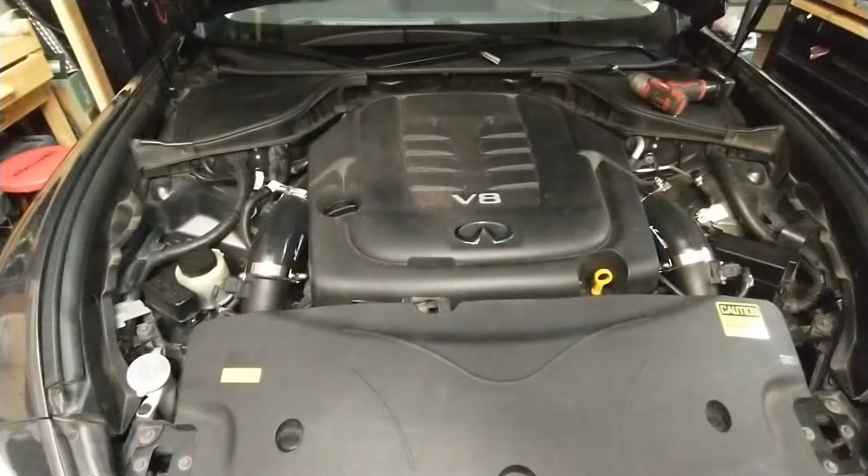This video is for an HPS performance cold air intake kit, so the paper says, but on the website they call it a short ram kit, whatever it is, go figure.

First of all, I did not want to get this kit. I was trying to get their silicone coupler kit, and that's not what's here. This is kind of a homebrew until their kits are available, but every time I order, they're seriously on back order, so I just never stuck with the order because they'll probably never show up.

Also, I used this silicone kit here with some drop-ins, I'll get you that brand name. Anyway, the drop-in air filters were kind of poorly made or just poorly designed, and they ended up breaking both my air boxes underneath. I'll probably have some video of that as well.

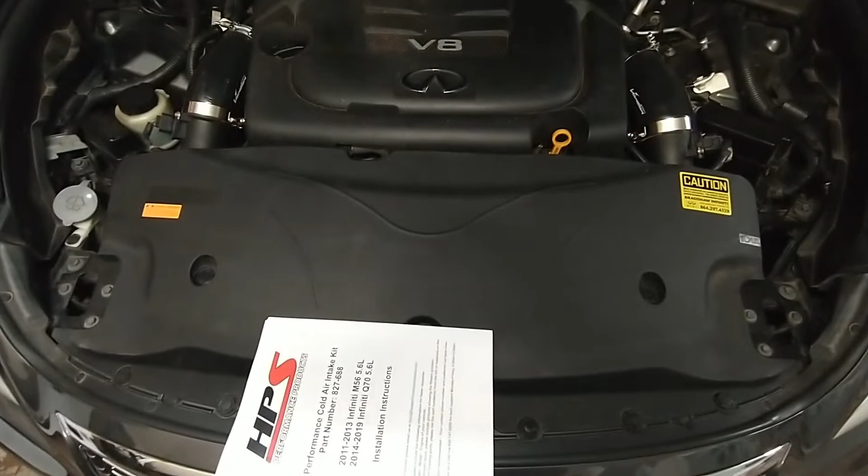The air cleaners are underneath this ram thingy majiggy, air ram. Broke both those boxes, and by the time I replace all those parts, it will cost as much as the HPS kit.

First things, just looking it over, it comes with a, holy cow. Let's see. Also, what's weird is you go to their website and they say something like 16 or 17 horsepower and 16 torque added.

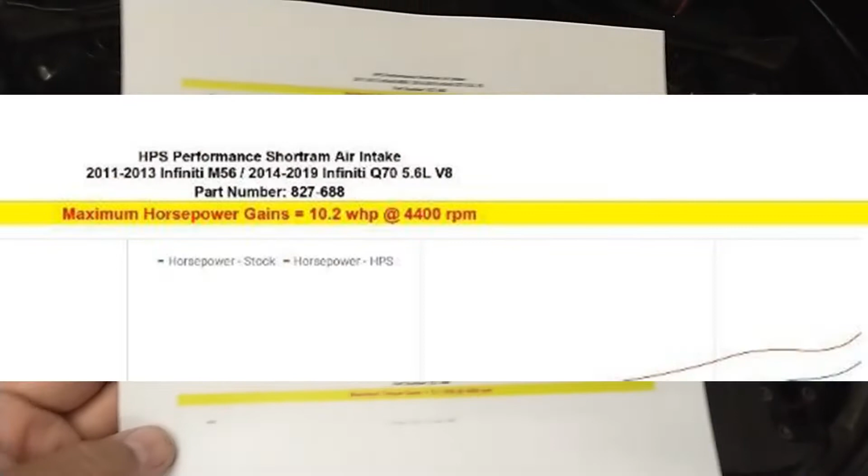Well, in this sheet they give us, I don't know if you can read that, I don't know if my camera can focus on it. On this dyno chart, I doubt it's for my tube specifically, they only add 10.2 wheel horsepower and 12.1 foot-pounds of torque. So I'm not in it for the horsepower, as promised.

I do have the uprev tune on this guy, and it did pretty good, but I'm having some problems. So by adding these intake tubes, because of price, when I get the retune, hopefully we get a little more ponies out of that tune with the cold air intake kit.

Anyway, this is the same air intake kit for the 2011-2013 M56 5.6 liter V8, and also early model Q70s with the 5.6 liter V8.

Here's the majority of the parts that come with the kit. You have some 3 1/4 inch aluminum tubes. You have what they call a MAF sleeve.

It's going to go in, let's see, where is that at? Here's where your mass airflow sensor will go in, this will go in there. It does reduce it from a 3 1/4 down to...

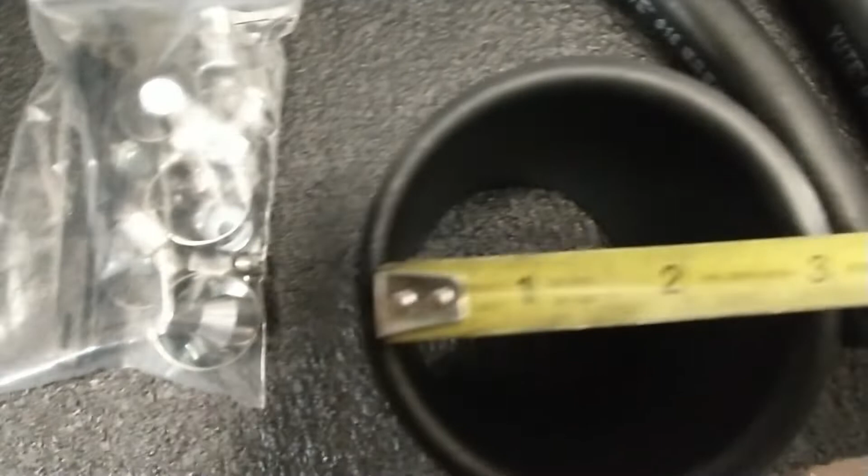Let's see, down to about 2 point... oh my god, where's my camera? 2 point something, let's see, let's do that again. Reduces it down to 2.8, almost a little bit more than 2.8 inches.

Giving it the old scratchy test, it appears to be a glass-filled nylon, so that's going to be durable. So we've got your intake tubes, the silicone couplers.

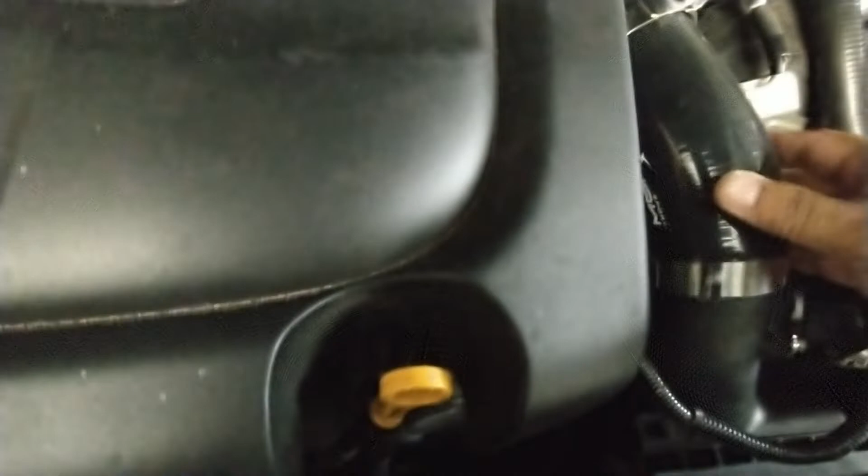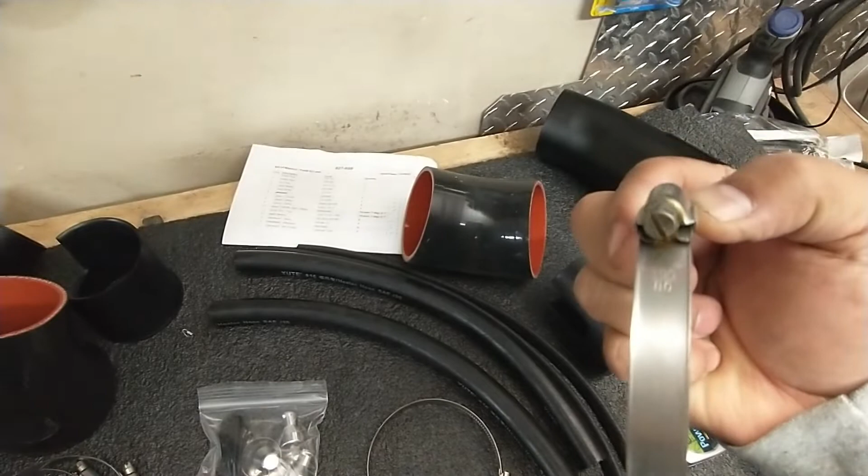It comes with what they list as EPDM heater hose. This will go from your valve covers back into the tube.

These are, can't think of the brand, I don't read, I don't know if that's Chinese, Mandarin, whatever. But I do have some nicer hose from this kit right here, it's kind of like a really firm fiber reinforced, I believe it's Continental brand, so I'll probably try to repurpose these if I can.

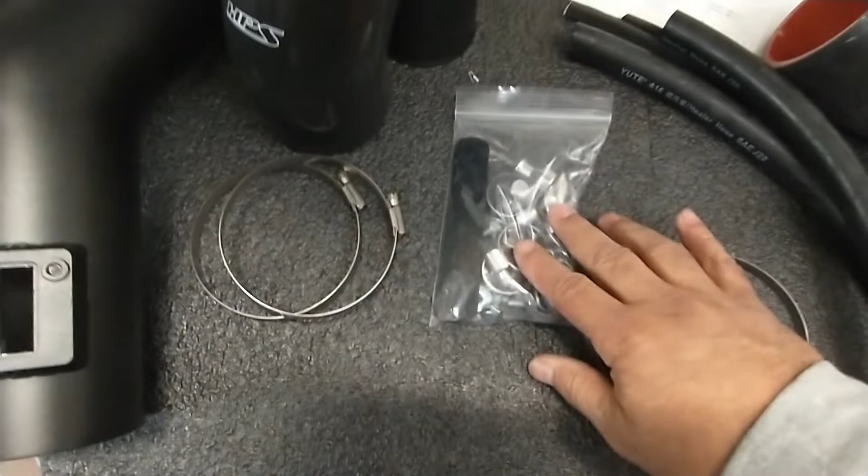And we got a bag of hardware, which is actually pretty well thought out. We got some little adapters that are going to go where the air cleaner box goes, and then we got some more worm clamps, they appear to be HPS.

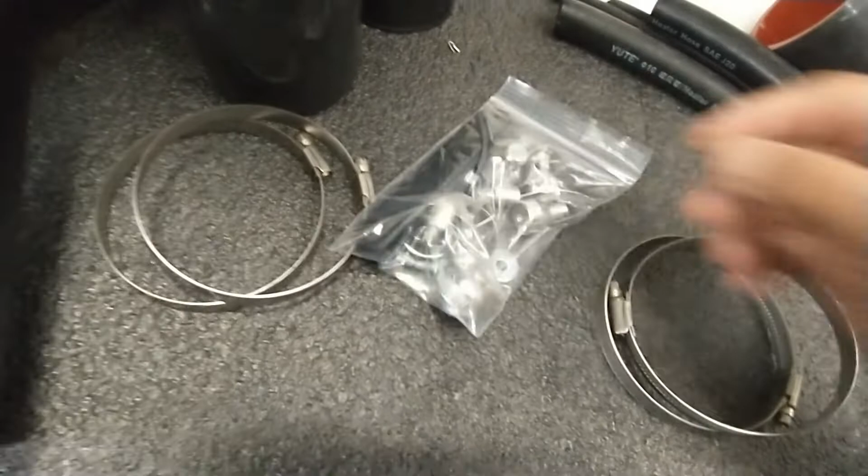Let's see, the tube, really pretty nice, pretty strong, but there are some oddities about it. I don't know if we can get in there.

Let's see if I can get in there. That little thing that goes to the valve cover, there's some splotchy welding, but on the exterior it looks pretty well done. But that little weld, I've seen better on some eBay cold air intakes, and if you look just past that tube or that hole, you can see a butt weld.

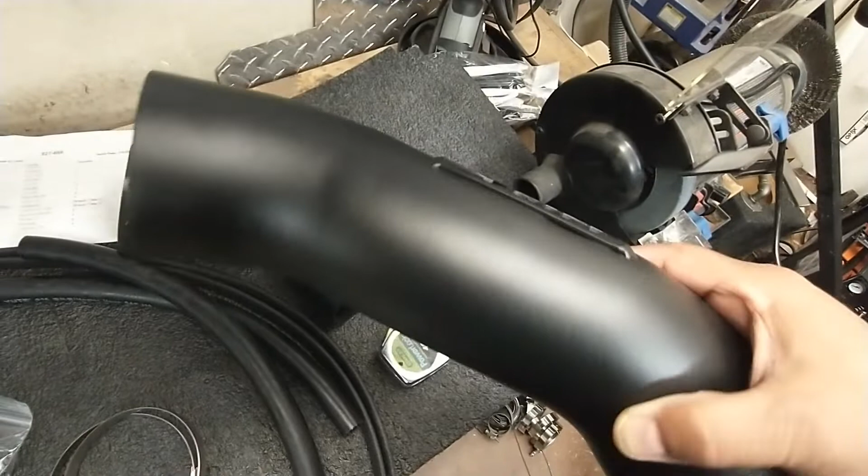A little odd. I'm not really worried about losing cross-sectional area or any kind of airflow. I'm not that worried about trying to squeeze an extra pony here and there off these, because it won't matter anyway. But you can't see the weld on the outside. If you look hard enough, you might see it, but I don't know how they do it on the polished tubes. Maybe they do it a little different, but from this end, the same weld is way down there, so I'm not sure why they had to go with butt welds. It doesn't seem that complex of a shape.

Oh, what else did I forget? Oh, these are little door trims that will go on the heat shields.

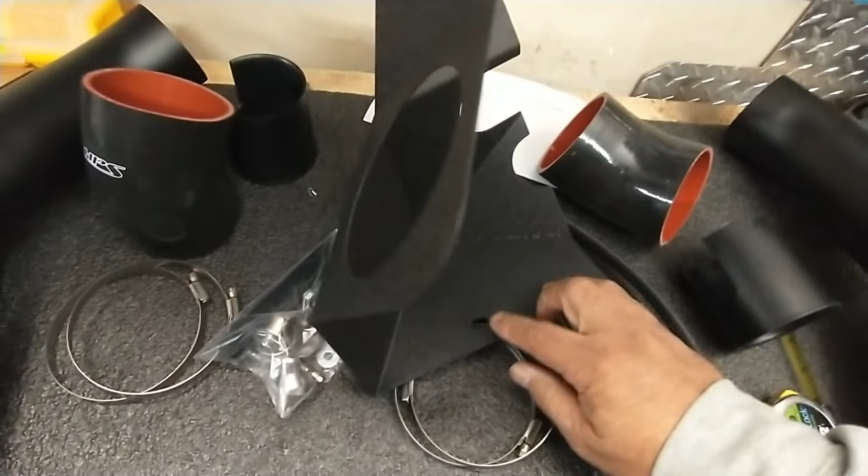And speaking of heat shield, here's the heat shield. It's going to get mounted where the air cleaner gets now. This will basically be a support for the air filter and the tube. I kind of wish I could keep the part of the air cleaner, and I'll show you why later in the video. But this will get bolted into, for some reason I got 4 of these little adapters. I don't know, I think there's a little strap or anything.

Also in this kit, out of all that stuff, they did not include an instruction sheet. I actually have to print that out. It's available on their website, but odd.

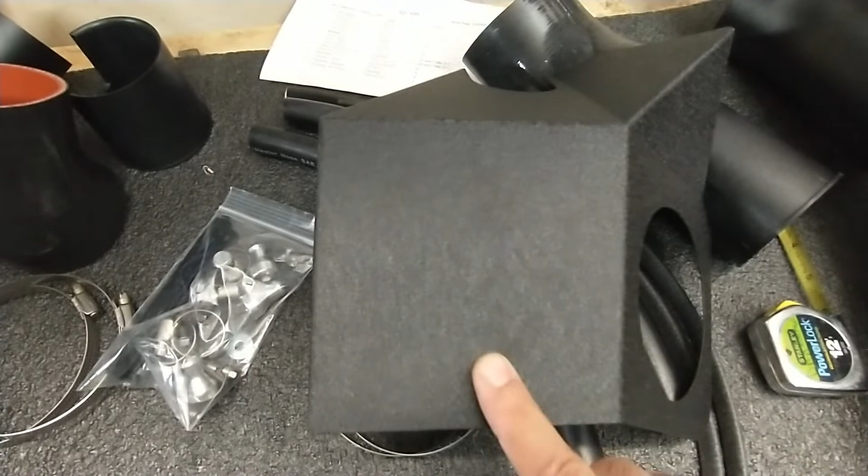Let's see, that's the heat shield. Oh yeah, and the heat shield doesn't come in an option of colors as the tubes do. The paint is not the same, or the powder coat's not the same. This is kind of like your wrinkle or your crinkle paint you'll find on old-fashioned toolboxes. Maybe not as intense as a Honda VTEC engine cover. And this is a way more subdued, very light textured black. You can see it fairly reflecting the light.

Anyway, let's put this down. Yeah, look at all that Harbor Freight tooling there. This is an HPS air filter.

It's an oiled filter, like a K&N. I was really hoping to get out of the oil business. I don't like having to clean it. They get nasty here in Arizona. They get full of sand real quick.

So hopefully, maybe later down the road, I've already spent too much money on this so far in my car that I'll replace these with some dry flow. But some general dimensions, the element.

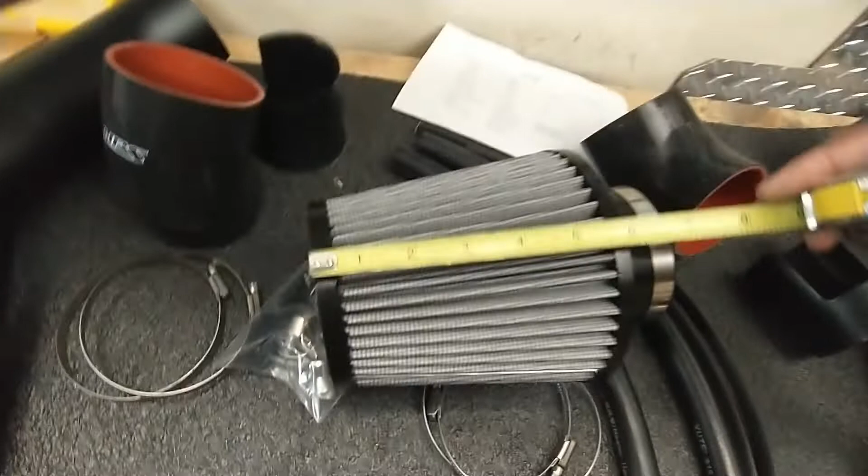The element is just shy of 6 inches. Overall length is about 8 inches. The minor diameter, if you want to call it that, is, come on, little almost 4.5, maybe 4.4 inches. A larger diameter, this one, I have to eyeball this one. It's about 6 inches. So with those dimensions, I'll probably replace it with something.

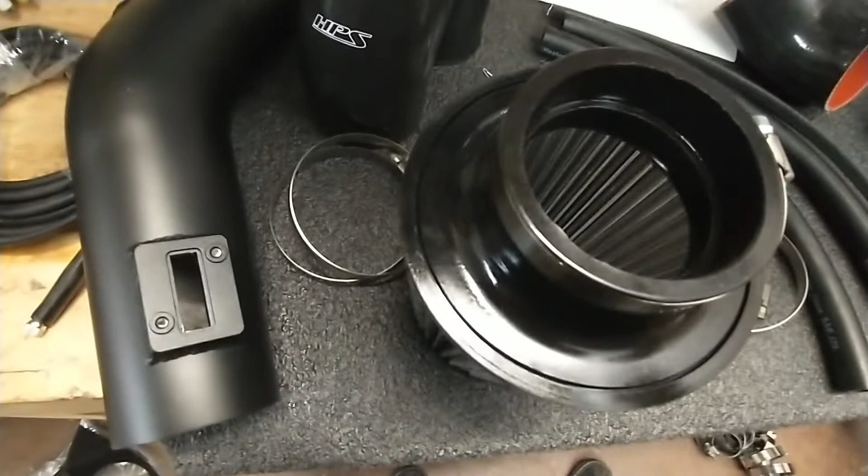This one, unlike any air filter I've seen, does have a stop right here. So there's no guessing where your air filter goes. This has a stop, but this should be 3. I think the tubes are listed on the website as 3 1/4. These are coming out less than 3.2 inches on that inside diameter.

Tubes are about, where is that? The tubes are about the same, just a little bit less than 3.2 inches, so not exactly 3 1/4, but close enough. And then back to the filter.

They didn't give me some of these nice, they're fancy HPS worm gear clamps. These look like regular old stainless steel clamps that you get for a garden hose. They're 70 to 90 millimeters, or 3 3/4. I don't think they have a brand on them.

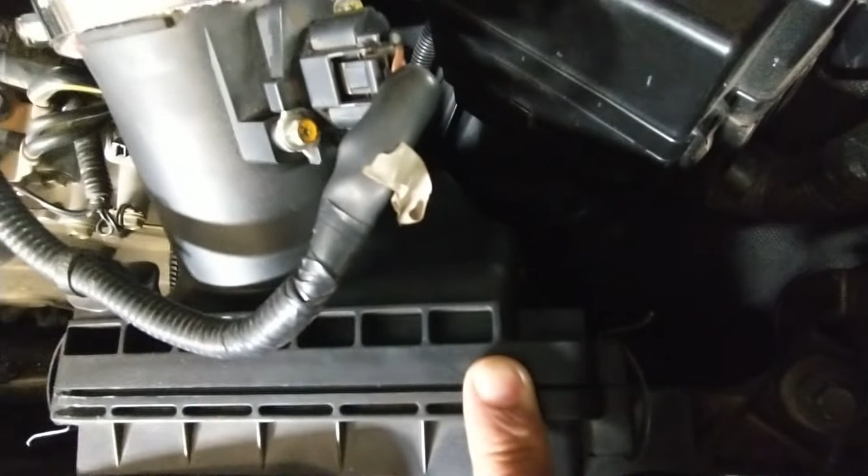They have Dyna Dyna Flow. So hopefully in my bag of clamps, I think these 3-inch clamps maybe will work. I don't know, these T bolts. All right, I'm gonna do some disassembly and I'll try to explain some stuff.

All right, so now I got the engine cover off and the Infiniti air deflector, which everybody's wondering, it actually directs flow from behind the grill down into these two air cleaner boxes. And this is kind of what I was talking about.

So you can't see it now, but I have some AEM dry flow air filters made for this car. But when I first had them, you could see this big bow, like just bowing out. And didn't really notice, and it broke the tab on this portion of the cleaner. That part was about 110 bucks to replace.

I contacted AEM, and they said they found a tolerance mess up in their die or in their molds, and as a courtesy, they sent me 2 new ones. But those 2 new ones were actually an older run than what I got now.

Sorry about the garage heater going on in here, or the heater to the house. I'm in the garage, it's about 60 degrees in here, so the heater's on.

I explained to them I don't want to pay for this. I got it, but they sent me 2 new ones, and those 2 are older, and they did the same thing. I'll take this apart in a minute and show you, but it broke this part.

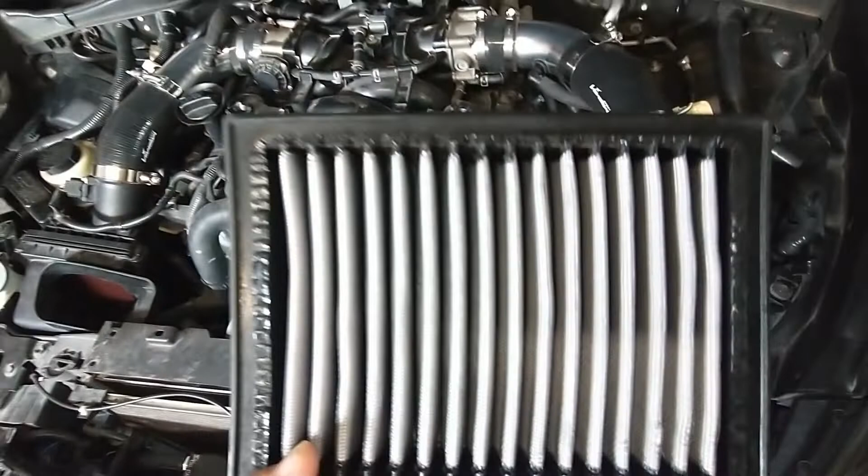As I was doing some work on some catch cans, I noticed that this side of the box is now damaged. I don't know if you can see it, but there's a pretty thick crack in there. I come over here, and I think if I'm lucky, this box that I had to replace on the other side did not break, but this part broke. There's a break there, and it goes all the way through.

There's also, I don't know if you can see it, but down in here on both of them, what those filters did is they actually bowed the plastic to the point where there's just a little tiny air gap. You can put a flashlight and see the gap, but I don't think I'll do that, it'll be too much camera work. Anyway, the damage is done, these air cleaner boxes are shot.

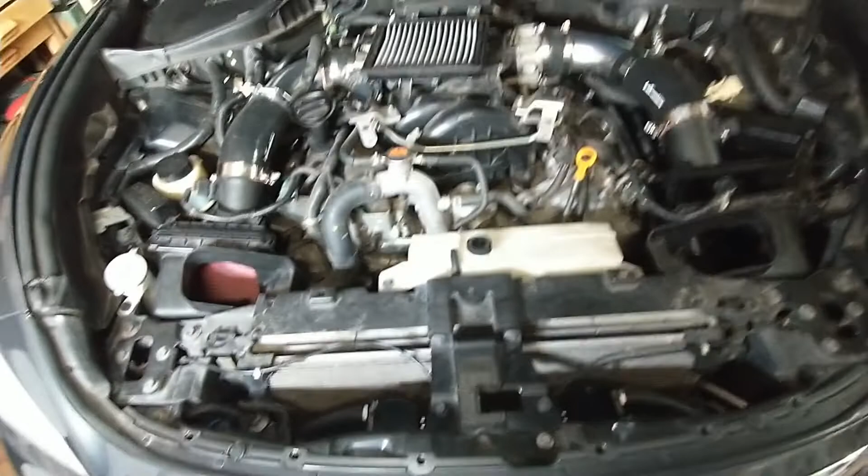One thing I saw some Amazon reviewers doing was trimming, because they had problems with fitment as well. Let's get this mass airflow sensor out of the way. Get over there. Oh, son of a biscuit eating. Anyway, let's see if we can.

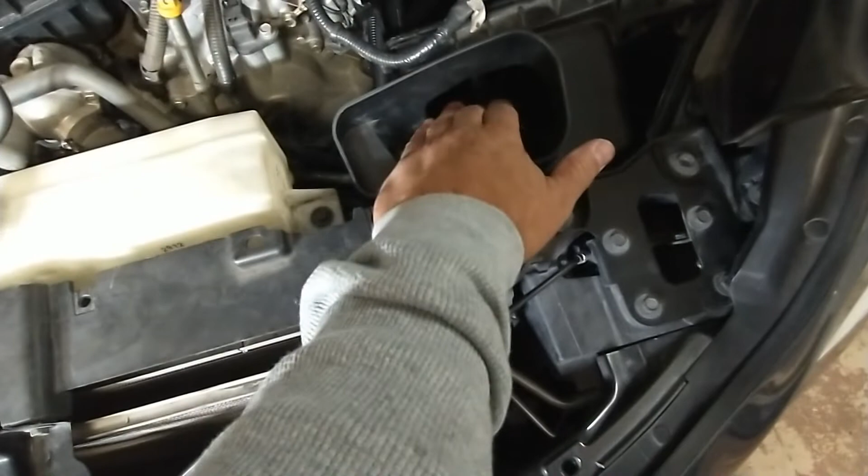I'm going to put this down. Here's the AEM dry flow. There was an edge, and I have the new ones, but they're still in the package in the house, I don't feel like getting them. There was just like a little seam or a seal, and it actually was just way too thick, and that's what was making that air cleaner just bow and look gross.

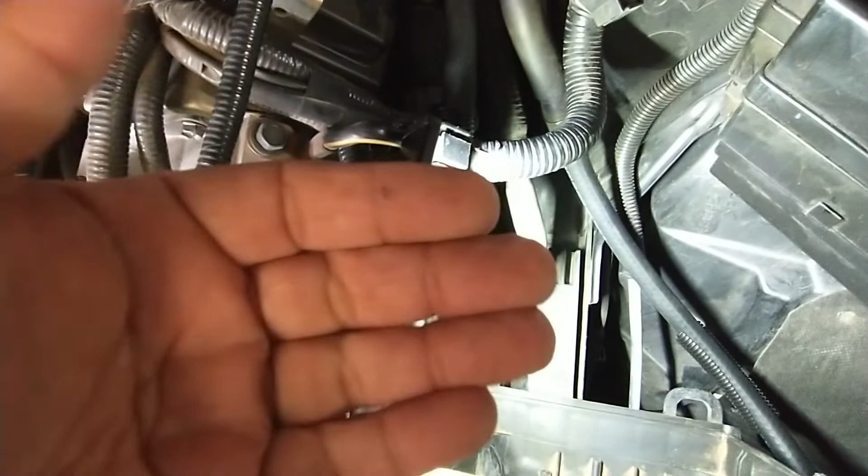That one's too new, I can't show you the crack, but that's kind of why I'm going with this cold air ram. It's not that I believe in cold air intakes generally, but in this case, I really think this will be a cold air intake. What's going to happen is there's going to be an air filter from the HPS located right about here, just where this air deflector will actually put air right into that filter.

One part of the kit I wish I had, or wish they did differently. Let me pause real quick and I'll get to that.

So let me see if I can do this. Right about here, there's 2 grommets that hold this on, along with only 1 bolt. Their kit's going to utilize some adapters that go in there, and I got a screw in that heat shield, which is kind of important for supporting all this tube and stuff.

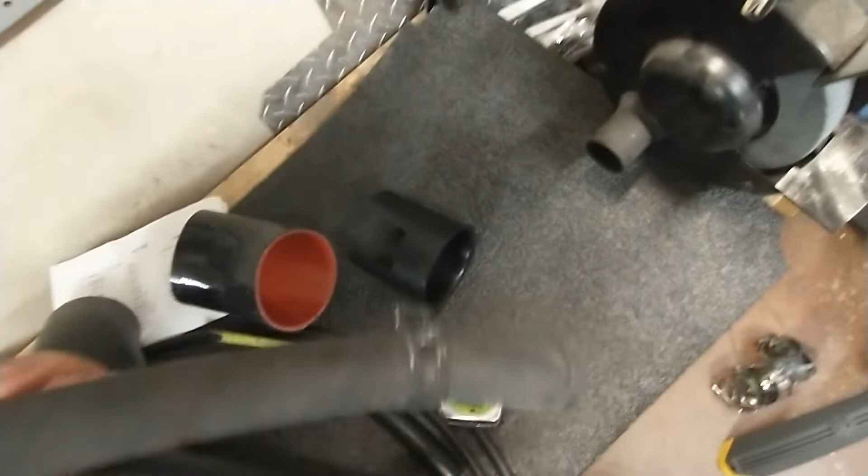But I really wish they had made it so I can put the heat shield there, maybe slide underneath, maybe make adapters or something. Since these boxes are shot, I might drill a hole through there to hold that heat shield. I don't know exactly how that's going to work out, or maybe down the line modify those heat shields so I can keep this box.

Because what will happen is air will go into this air dam, down into this little duct. There's like a little deflector in here, and it'll send the air straight into that air filter, which will be in kind of this position.

So I'm going to play around with that. I probably won't get it done, and I'll just get this installed so I can play around. But I really wish HPS would make it so I can keep this little tunnel thingy majiggy, because there's no filter there, it goes on the other side. All right, so I'm going to start putting this together according to the instructions and see how it goes.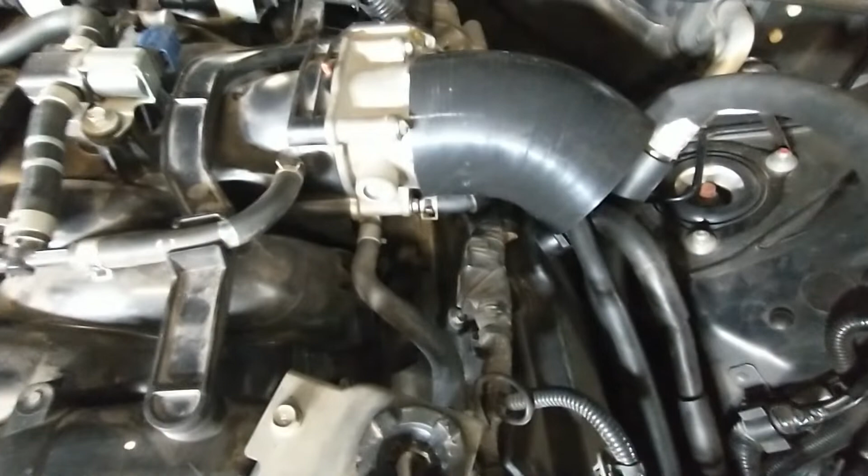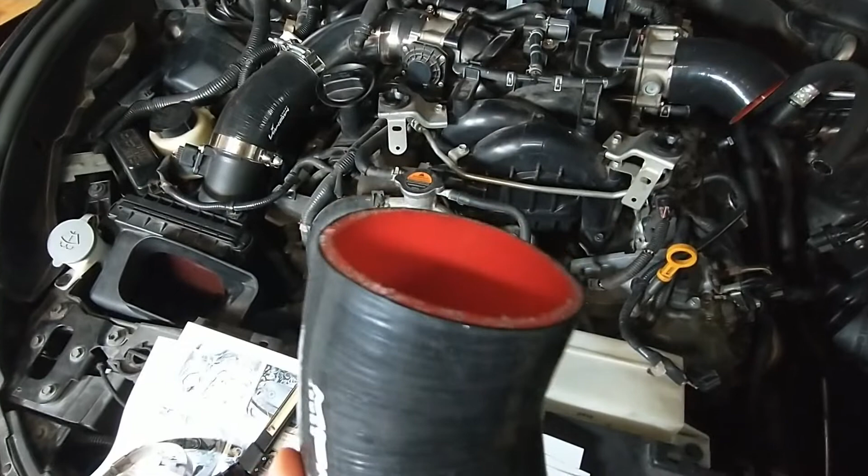As I'm taking this apart, I'm noticing this little spring clamp is way better, way quicker to work with, especially on the side of the road. I get to use these clamps on the manifold to this little tube, and they're the same hose, almost coincidentally about the same length. It's already got the nice pre-curve here, and this is actually an Aeroquip hose I got, a way nicer hose than the Chinese EPDM. Anyway, I'll be reusing these nice hoses, thank God. I couldn't believe how perfect a fit these will be.

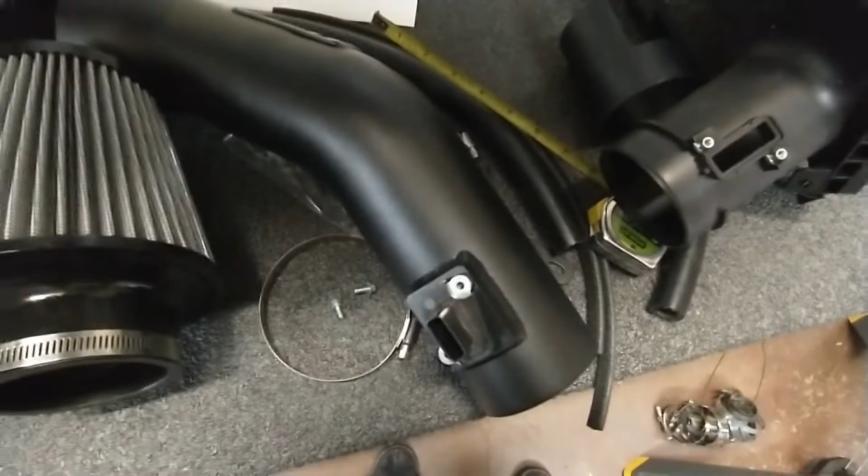Step 11: insert short side of the coupler into the driver's throttle body along with the provided clamps. Now, this fits really loose, not a turbo so I should be okay. But oddly, this knee tube off eBay fits on there way better. You kind of have to really try to get it on there. Part of me wants to cut this coupler down to that size, but it won't fit the aluminum tubes. I think they could have done better with that somehow, maybe a more custom tube. It is branded, but I think they could have done better.

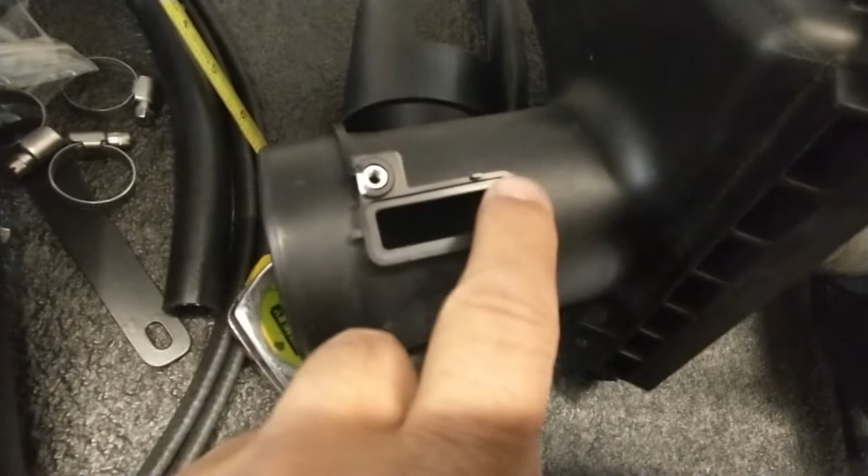Did you know Knight Rider's KITT can drive on water? That's the first I've seen that.

Step 13: insert provided M6 bungs into the factory airbox grommets. That's these two guys. This is where I wish somehow I could adapt the plate with the factory air cleaner box to get the air to go through.

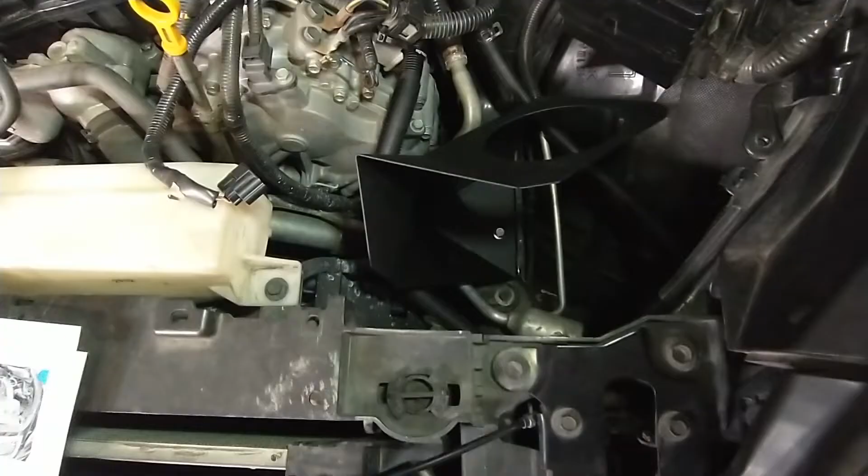Step 16: remove the mass airflow sensor from the factory tubes and install it into their tube. Lucky you can't put these in backwards. I'm glad Nissan did some kind of design, otherwise I was a little worried because this is symmetrical and doesn't look as obvious, but it only goes in one way. Also this cutout, they incorporated a little rubber cylinder that fits in there. It doesn't feel as positive as the factory one.

I'm not going to put any O-ring grease on there, that's just silly, but I'll have to be a little more careful installing this into the HPS tube. So I got the mass airflow sensor in, and I think I know why it felt a little weird: the O-ring gland in the aluminum tube is just a little shallower than the one in the factory airbox, so the O-ring goes a little squishy going in, but it fits well. There was a little schmutz probably from the powder coat. These went in a little hesitant, I almost felt like I was going to strip them, but wasn't too worried. I could re-tap them if I have to, but they do go in. There's just some powder coat in there.

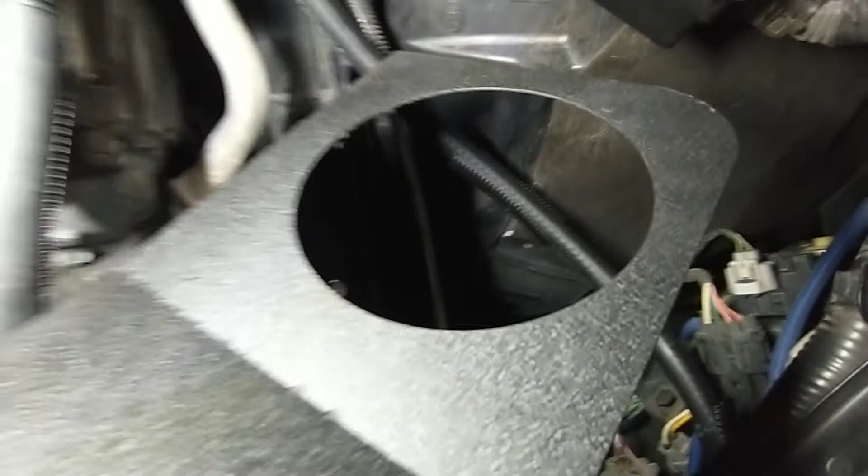Just keep screwing. Step 17 -- did I say the last step was 17? This is 17, install the heat shield. One screw goes in here, and I already installed that one previously. There's a little bracket underneath, I guess it helps make those two rubber grommets one single unit for rigidity. And this went in pretty easy. It's a tight fit in there.

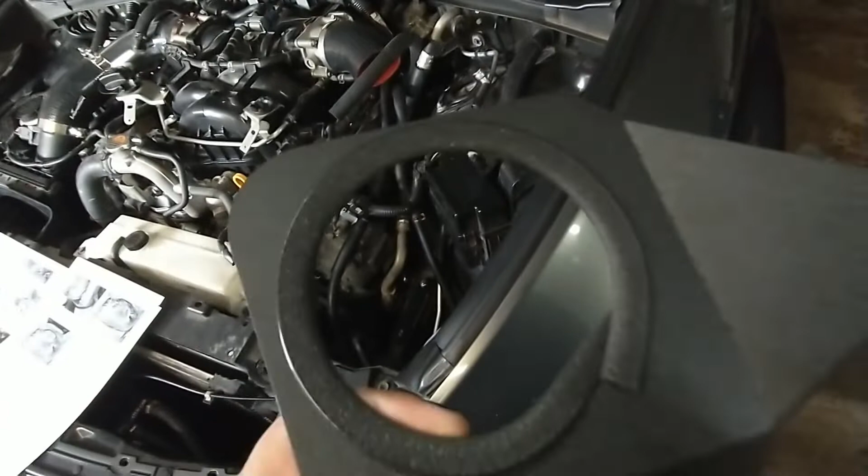I assume the other side's going to be even tighter, but downside, you can see this little tube rubbing right against it. That goes to my oil catch cans that I spent all weekend doing. So I'm going to have to either buy more hose, reroute this, or maybe add some really ghetto generic chafe guards made from wire loom. Down there, that tube is the other part of my oil catch cans, getting a bit of rubbing too, so I might use this heat shield to my advantage. Maybe drill a hole on the side and make some smooth piece of plastic, print it, or make something. But that's another hurdle I had to come across.

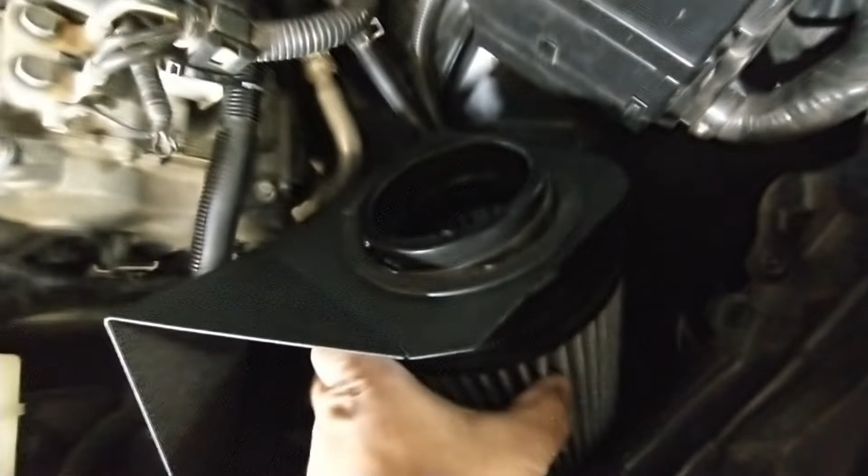These screws actually miraculously tightened pretty well, seeing that the little bung just goes into a rubber grommet. I thought there'd be some spinning, but that screw bolts in pretty tight. Well, I didn't read the instructions right.

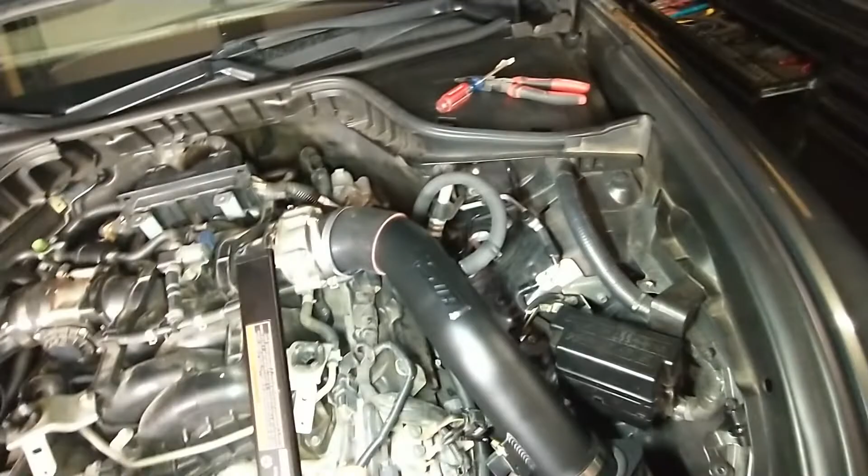Before I put this heat shield in, I was supposed to put this trim in. This is odd, I thought the trim would go along the edges, like you see on a K&N or other filter, to seal against the hood, but this won't go near the hood. It's a little long, and honestly this has been the most difficult part of the whole process. I'm just going to guess where my trim goes and finish putting it on. A little snip, and it's in. Not pretty, not perfect, but hopefully it'll be down like this and no one will see it.

Next oddity: the next step tells you to put this filter in through the hole, but it doesn't fit through here, so you kind of have to force it, which feels gross, but you won't be able to get to that little screw easily otherwise, so you gotta do what you gotta do. Also with this in, oh come on, it's gonna go like that, so my idea of scooping air to there may not be the most optimal. Also, it's gonna be weird to get to that clamp. Maybe the clamp goes on the other side, we'll see.

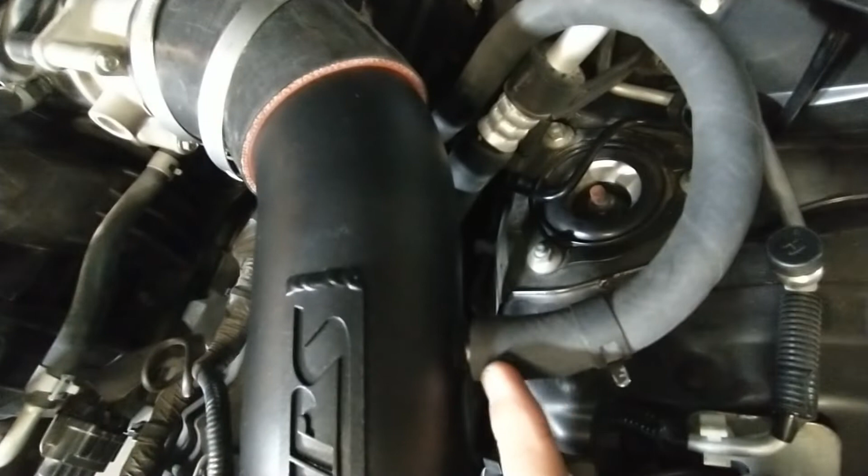Next oddity was trying to figure out where this tube goes. I've done a lot of cold air intakes and home brews and never had this much trouble. It's a matter of getting this to follow this right, and this thing is really not supported. There's a huge gap here. I'm gonna keep trying, but this hose does not fit this geometry. If I shove this tube more into here, this hose just starts to run into this radiator right here.

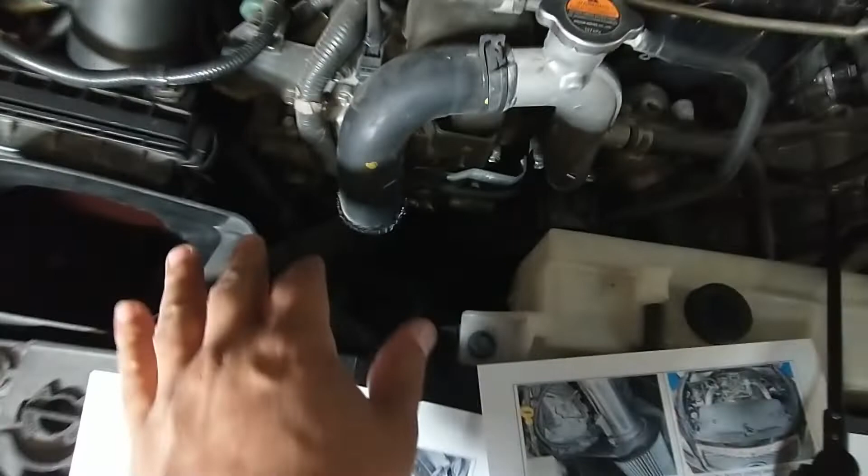Man, I've been fiddling with this for a while. This isn't the hardest, but the longest part. Also trying to keep this tube from crimping. I could probably trim it, but honestly I don't think that's going to help. Pictures and the instructions don't quite explain how this goes, but I'm battling the curve and the breather hose.

And this filter hits a thing we really appreciate here in Arizona: air conditioning. Right now I can get my hands in there, which is good, but this thing fits a little better if I pull it forward, and if I pull it forward, the air filter hits. But I don't think it's going to get any stiffer once I clamp it up, so eventually I'm going to probably make some brackets.

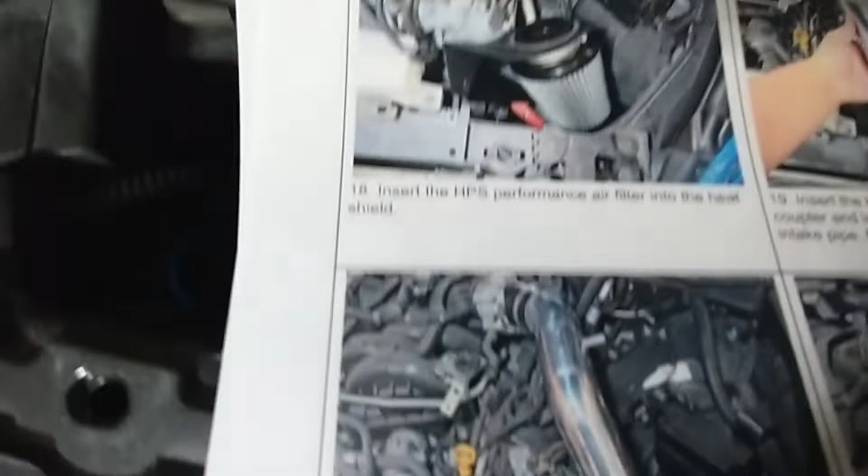I have a bunch of little brackets, maybe come over here, bend it, and bolt something in here just so it's more rigid. And then same thing, I'll probably try to make something over here, but I might keep fiddling with this and see what I can do.

Well, that's about as best as I can do. Let's move this. As I move this pipe forward, it'll pull this right out of the grommet. This doesn't bolt in, but I got it to work. This tube isn't crimped, it's a pretty rigid tube from Aeroquip. The clamps don't look that great because it's kind of on a curve, but it'll do.

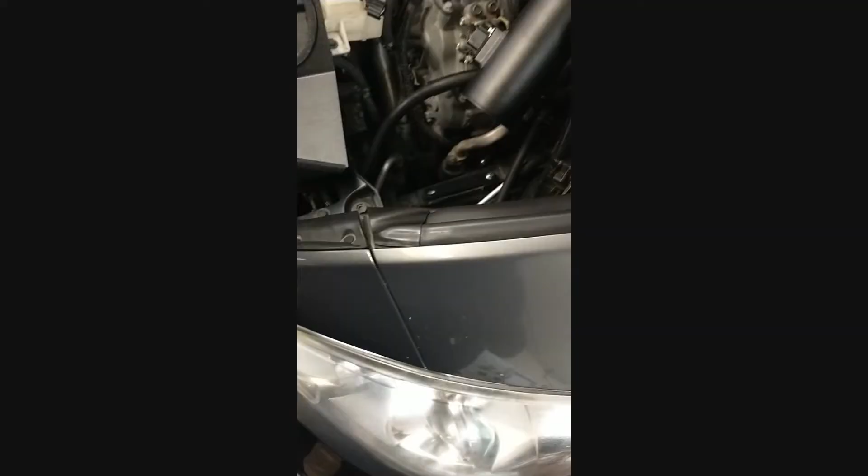So I take it this side's done. I'm not going to be able to build a bracket, and I'm not sure if I'll even include it in a video. We'll see how long before I edit this video.

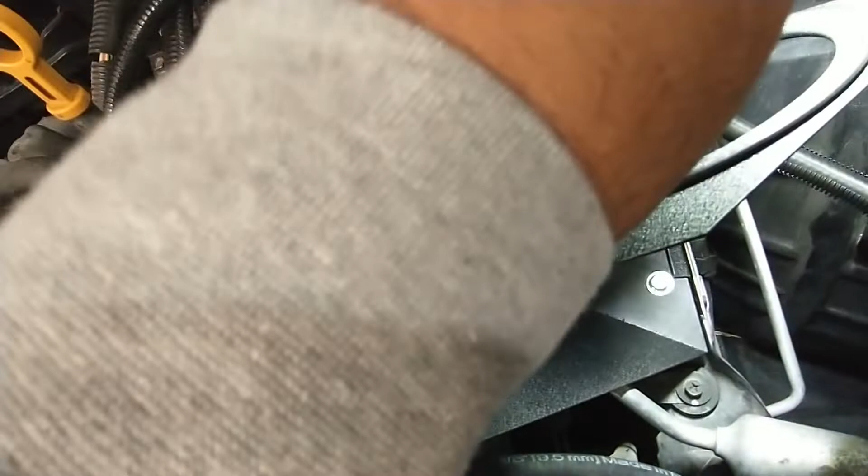Once you get my thumb out of there, once you get it in there, it's pretty firm, but as you wiggle it, nothing really hits anything. I just have to worry about my oil catch can hoses. This one down here seems okay, this one's a little tight, and I'm just too tired to do all that stuff tonight.

Well, that's the driver's side done, so I'll get the passenger side in real quick.

I really need to learn how to read. I was also supposed to put that leftover trim piece here. I guess that will prevent some rubbing against the metal frame, which is pretty good. Good calling them. And I also forgot to put these bolts in with washers.

My bad, another damn situation. I try to put this trim in, but it gets in the way of that bracket that goes from bolt to bolt. Let me get some light out. It kind of gets in the way. Also, I believe it's pushing it too far back.

Right now this heat shield hits part of my air conditioner. If I do this, you can see that there's some weight on the bracket. It's definitely on it, I can't even put this awesome Rock Auto magnet between there.

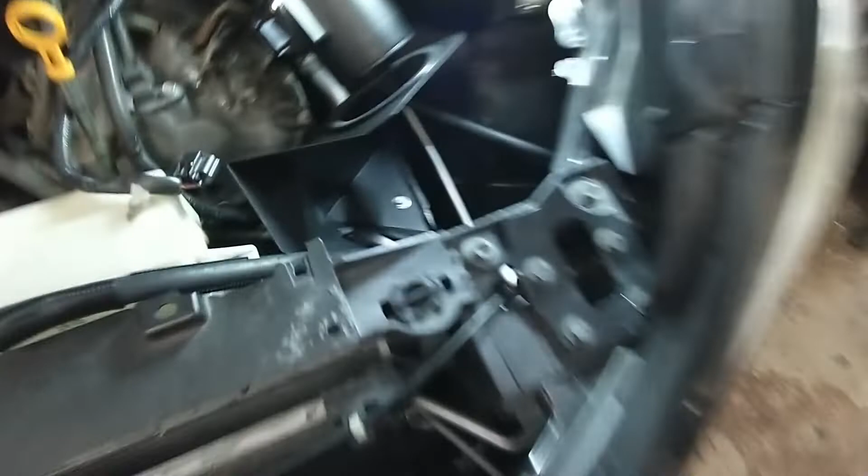How about that? I'm going to remove that little insulating strip, and maybe it's supposed to go on the car. I can't tell, but I think it's going to fit better if I take that off.

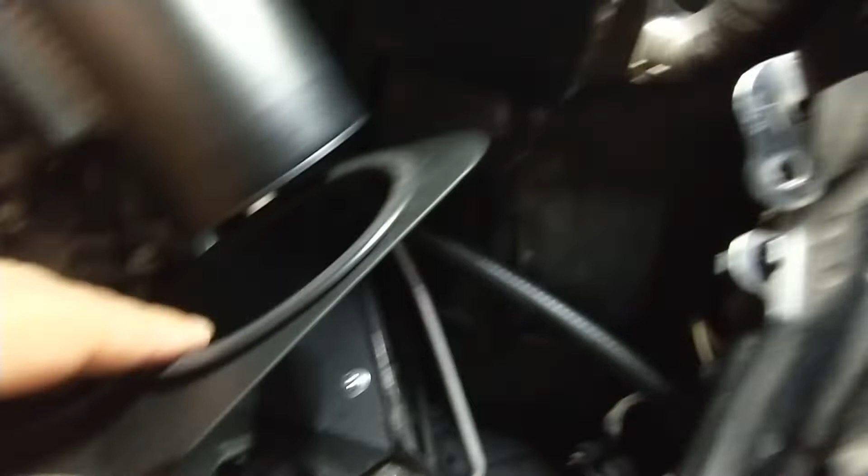Well, that took too long. I got it in, did not put that extra piece there. I actually punched some holes with my handy dandy Harbor Freight hole punch. I suggest you actually get one, you never know when you need one, like today. That's probably the second time I used it, but I'm glad I had it.

You can see I cut quite a big gap, almost defeating the purpose of a heat shield. And then I use the trim right here. This is just like a little bracket or isolator, but there's actually like a clamp. So it's kind of, I didn't want metal on metal, and I got tired of cutting holes to make this thing fit.

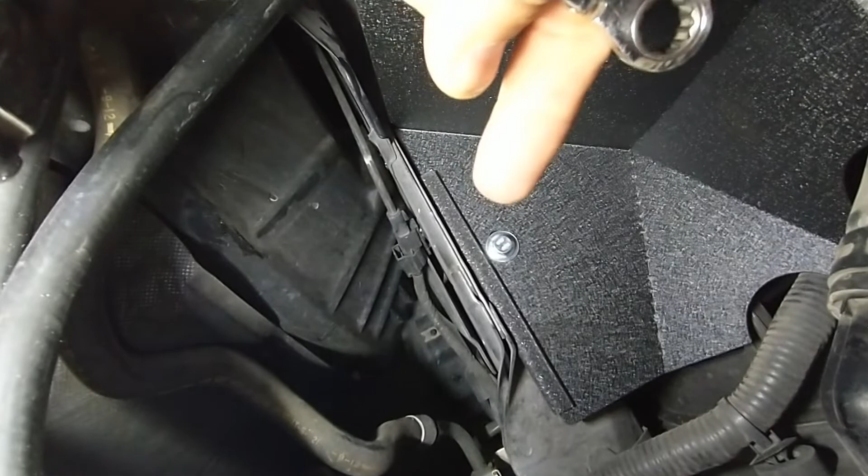But you can actually see, can I get something flat? You actually see how that AC line really gets in there. So I made a big gap. I'd rather have air conditioning than a fancy schmancy cold air intake. But as I did that, this is now somewhat in, really not that great.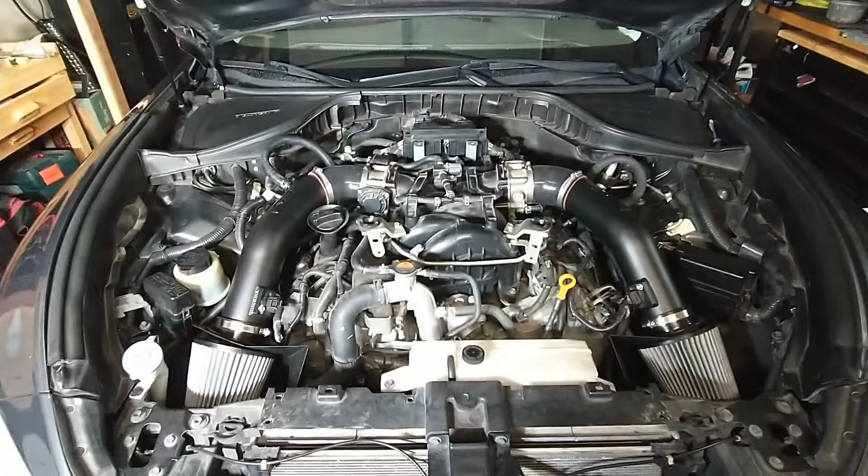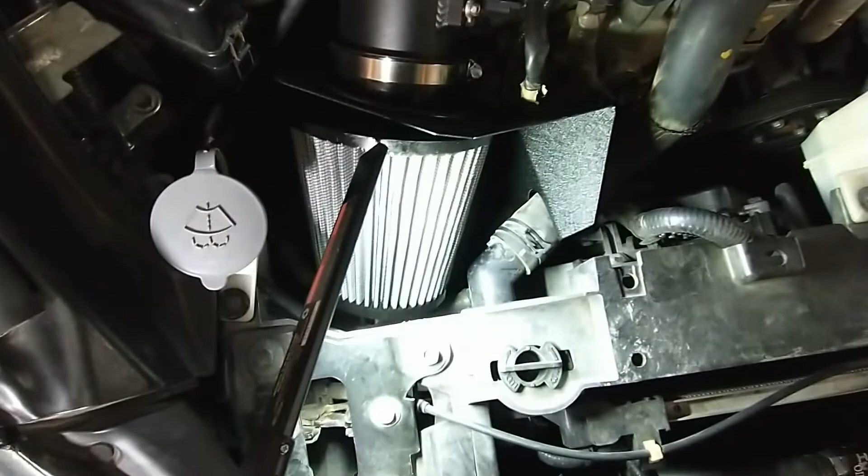I really need to make some kind of other bracket somewhere, but just loose as a dog. All my bolts, I'm checking all my, you can't see back there, but both bolts are pretty tight. After I did that, now I'm going to have to readjust this tube. Oh my god, this thing should have been a little quicker, especially for the $400 you pay for these kits. Alright, I'm going to try to readjust that and get to the other side.

Alright, passenger side went in a little easier. I was able to use the weather stripping. It kind of makes it a little firmer, but whoo-wee. Can we get some light in there?

That is cutting it close. The upper radiator hose is actually hitting. Son of a bitch. So I might put the hole punch to some use, but I don't know. I'll figure it out. Well, she's in, but it's not in its final state.

Right now you can probably, I don't know if you can tell, it is not symmetrical, which drives me crazy. This one kind of follows plane. This one kind of has to come up a little bit, but that's the only way I could go. Let's see if we can get a flashlight.

So the only way I could do it, I had to adjust all this hose just in order to clear that hose, and there's a loom underneath. So I'll probably end up making those holes bigger than they need to be.

Also, probably what I'm going to do this weekend is make a bracket from here to here and from here to here maybe, and then hopefully it can readjust all this stuff. Like I said, this needed more adjustment than a damn corset or something like that. I don't know, I'm not very funny.

Anyway, this took a lot of adjusting, just frustrating getting it in there. And then my Aeroquip hose was just a little too short, so I am using the Chinese EPDM rubber hose, but I'll order some more of that fancy Aeroquip hose.

Then I'll also probably have to adjust this down as soon as I get some holes fixed on there. But this overall thing is really not... it's not that great. I mean, it is wacky. I don't even know if my cover will fit.

And for $400, I expect it just a little bit better built. Also, there's a huge gap right here that I just couldn't get rid of because of the holes.

Since this one's a little loosey-goosey, I'm going to have to keep an eye on it. This one's nice and firm because there's hardly any gap, but they don't give any provision for this. Not like I'd want it on the hose, but they didn't think about the looseness.

This mass airflow harness is going to sit there. Air conditioner, what a problem that was. But like I said, it's kind of one of my only few options other than spending the same money on OEM parts and hoping they don't break.

For the install, not a lot of tools — not a lot of tools unless you consider Mr. Punchy right there. Pliers to get spring clips on, body panel, plastic rivet remover, a deburring tool if you're like me and had to cut holes. And I believe I used a 7, an 8, and a 1/4 inch socket.

And that really is pretty much all you need to put one of these in. So tool-wise, it's simple. The way it looks and the ease of install, not so great.

Oh, so I forgot to say, this hose — they could have done something better with this. I don't know, this is something I did on my own or on that other intake, and it's just kind of shoddy. There's a lot of rubbing things I've got to figure out or do something about.

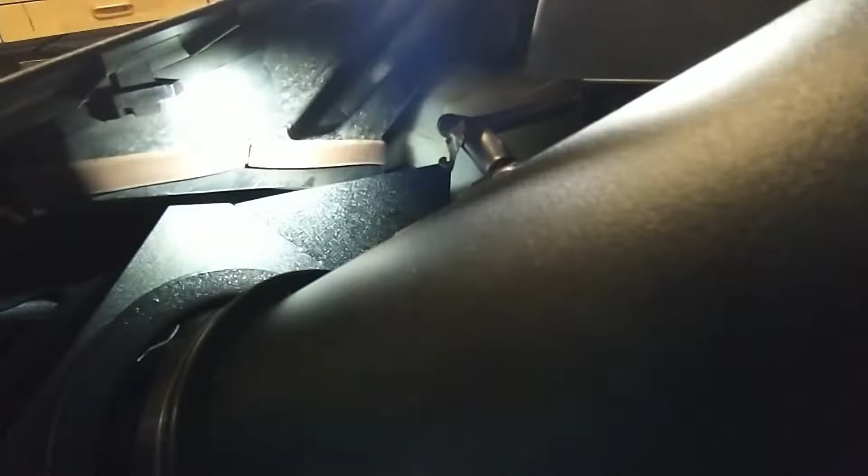There's no way of avoiding this — it's in their picture, same thing with that one, it's in the picture that way. They could have maybe angled this tube that way instead. It wouldn't be that hard.

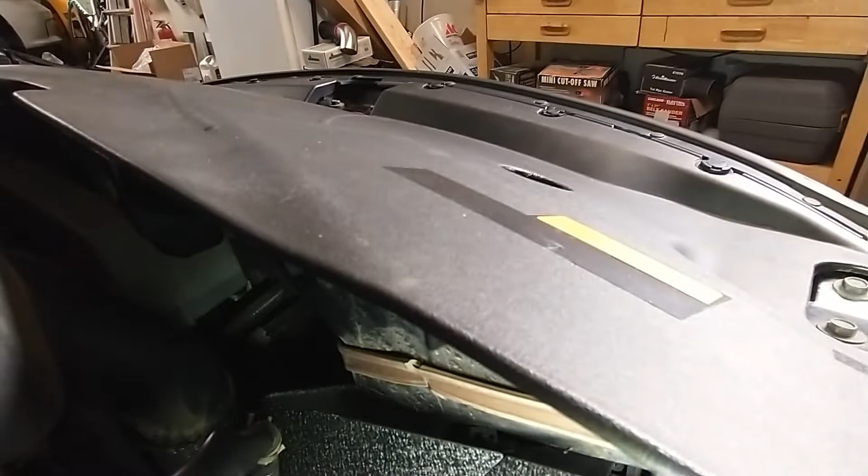And I don't think it's going to mess up any kind of Venturi or any fancy vacuum going on. Your PCV valve on this is down there somewhere else, so PCV-wise, that's not what this does — this doesn't really do much. Anyway, they could have thought this out a little bit better. I don't think this intake system's really, what's the word, researched.

I think they made it fit and went to market with it. I think it could use some refinement, but I'm a smart guy — I can figure that out.

Well, she's running. Honestly, at first it gave me a little sputter, but I honestly think that's probably because it's cold. It's 50 degrees here in the garage late at night. Getting air things, checking all these things. I'm going to put the cover on, see what happens.

One thing before I go for a test drive — ran it for a while, it's nice and warm, didn't get any check engine lights. But the idea of using the factory air box as a way to get fresh air, not going to be needed.

If you look right here, this is the air deflector, and it goes right into this heat shield, which is kind of cool. I think I'm kind of almost hitting right here — this gasket might fall off. That's something I put in there because the OEM one rotted.

But it looks like we're going to be getting fresh air in there and some vroom vroom noises. Let's check the other side. Oh yeah, that air box — this is something I just couldn't anticipate until getting it all done, but that air box looks like it goes in there pretty good. So we're going to be getting some fresh air in there. In a roundabout way, I guess this is a cold air intake.

Again, I saw all these lights and I about freaked out, but let's see, I'm gonna try to perform it for you. This actually happened in the city, but I've been trying to reproduce it, and I can't seem to get it to do anything below 65 or 70, but I'm gonna throw it in neutral.

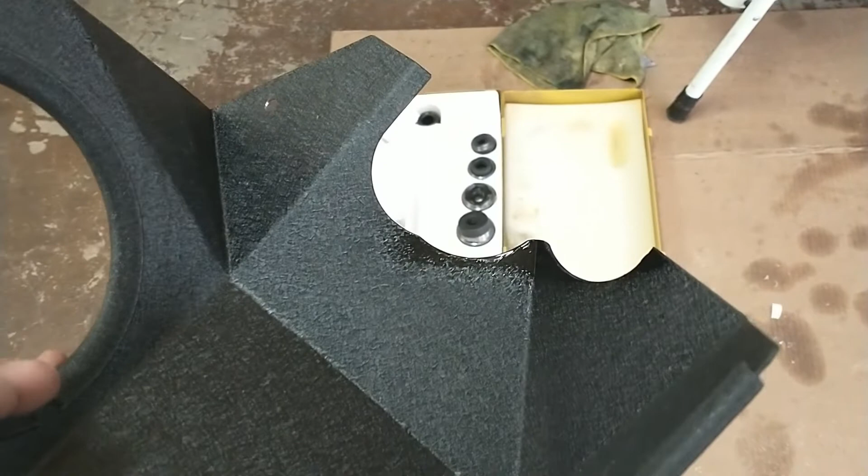There you go, first try on camera. But like I said, your power steering's a little weak, your braking's not so great. You could always just start it back up.

Kind of unsafe to do that, let me put it back in drive. But like I said, most people probably don't do that. And you're asking, why do I do that? Why does Dayho do that?

The bearings in this car are amazing. Even with 66,000 miles on the odometer, I can get to a decent speed really quick, throw it in neutral, and coast for an amazingly long time, especially when I know there's a stop coming up. But again, that's not great.

I don't even know what speed that was, you can see it on the camera, but I'm doing almost 60, and if I throw it in neutral, you can see, not too bad. Like I said, for city driving, it did it to me once.

So there you go, so far so good. Installation was a little bit of a bitch. Throttle's a little different, and this whole neutral thingy.

All right, the weekend's around and I've had some time to fidget with it. I spent hours trying to get brackets made. It's way too tight, so I busted out with Mr. Punchy and made these holes.

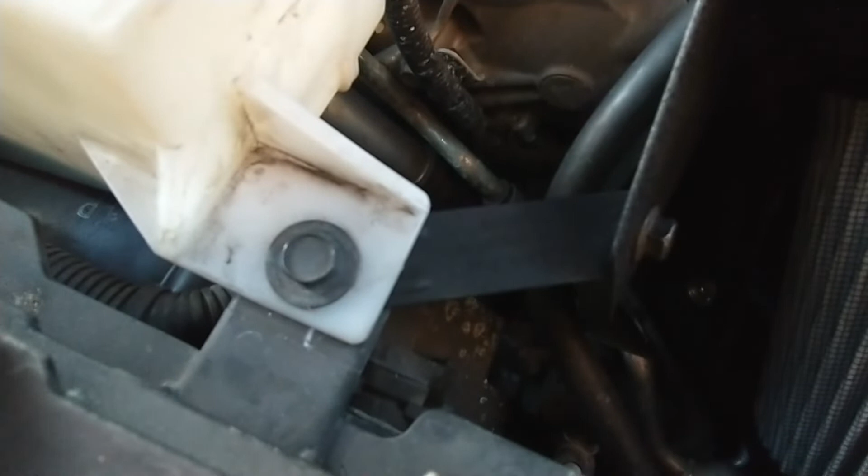I know you can't really tell, but you can see right here where I cut another hole and kind of rounded it off. Would have been a lot easier if this was made out of aluminum, but no, this is made out of steel. Mr. Punchy goes right through it like it's nothing, but it would be easier to work with if it was aluminum, and I wouldn't have to worry about rust.

I live in Arizona, rust isn't a big issue, but either way, I don't like shiny stuff, so I had to touch up some spray paint. Hope that all works out well.

Now it may not look like it, but there's now room underneath this radiator hose, and down here it's clearing the harness. Like I said, this is taking a while.

And here's a homemade bracket. I don't know, it's just scrap metal, but I powder coated it. It's like a Harley black. I don't have wrinkle black in powder coat, but hey, what the hell, it almost matches.

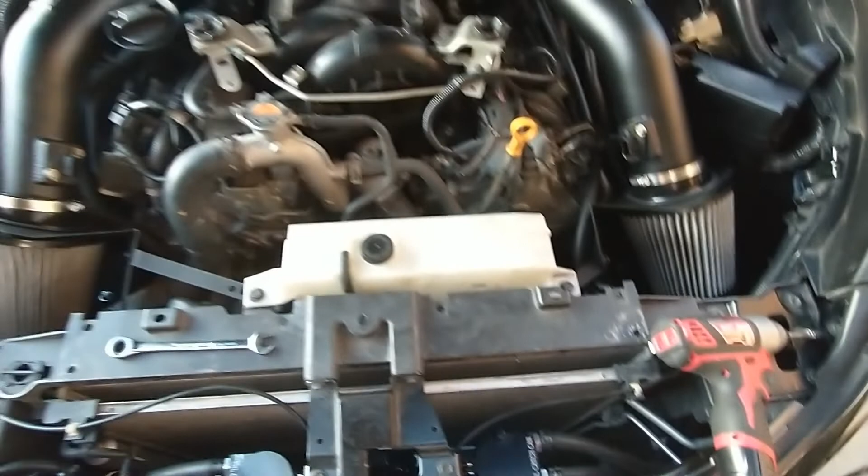Alright, well that's in. You can't see it, but I had to get Mr. Punchy again to clear that harness, but there's plenty of room all the way around. Not much of a heat shield anymore with all the holes in it, but after hours of making this homemade bracket, this one's actually pretty stiff.

But no matter what I did, there's still, I would say, 3 fingers of gap in there. There's no way this could ever butt up right there. The angles aren't right, the length isn't right. I got 3 fingers there, and maybe almost touching, maybe half a finger, my fat finger at least.

Got this side in, that's not so bad, but oh god, there's about 2 fingers right here. You can even see that.

That's just this thing, I've been wrestling with this dirtiness. I don't know what it is, it came that way. I've been trying to clean it, and it was not clean from the start, but must be some kind of film, some preservative.

Anyway, I got this side in as well. This side fits a little bit better, almost flush with the cone. Nice and sturdy.

And if you look closely, I am using a Schlitz can opener, or beer opener, bottle opener, something opener, but it's Schlitz, and it's powder coated as well.

Speaking of that being flat, no matter what I did, I could not get this to fit flat with this. One day I might be making brackets from the fenders, but these are actually pretty sturdy now.